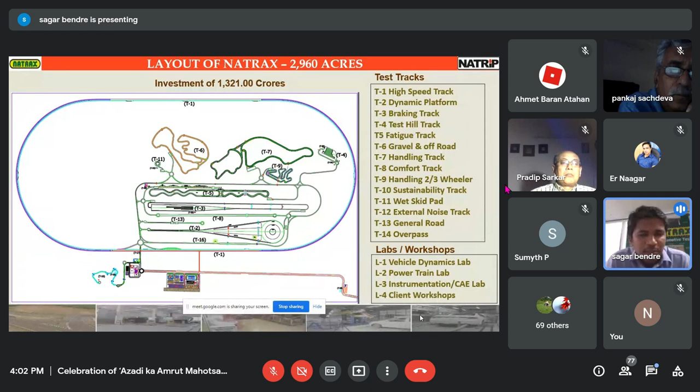The heart of the proving ground is the high-speed track, which is almost 11.3 kilometers. You can see the blue line on the outer periphery in the oval shape. And the inside facilities are the other tracks mentioned on the right-hand side, which cover all the durability and performance evaluation. So let me show you the aerial view of the Natrax facility.

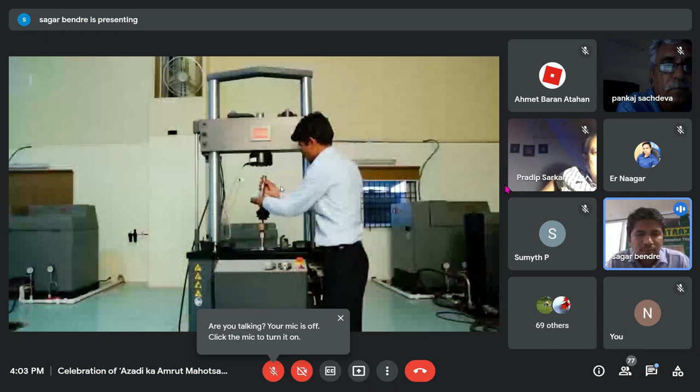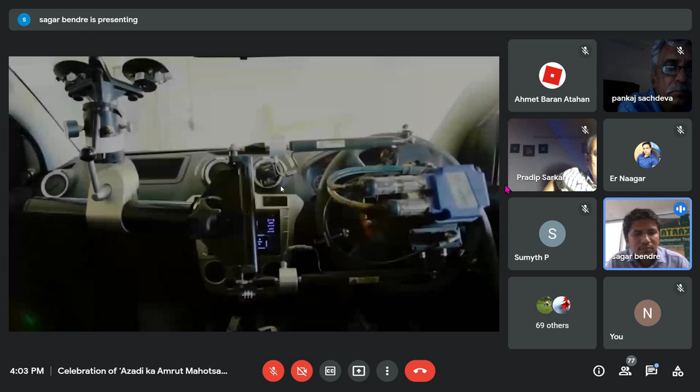Natrax, National Automotive Test Tracks, is one of the important centers under NATRIP and is one of the largest proving grounds in the world, spread across 2,960 acres at Pithampur in Dhar district, Madhya Pradesh, India. Natrax is a project of the Government of India set up to support the growing Indian automotive industry. Natrax offers 14 different types of test tracks, supplemented by state-of-the-art test equipment, research and development laboratories and workshops for comprehensive testing evaluation of all types of vehicles, ranging from two-wheelers to heavy commercial trucks, for vehicle dynamic performance, durability, and development testing by the industry.

The special tracks are dynamic platform, 1.8 kilometers long, braking track with 6 special surfaces for dry and wet tests, handling track of 3.6 kilometers long, fatigue track with 8 different surfaces, Belgium pavé, washboard, potholes and ditches, twist track, comfort track with 19 different surfaces, sustainability track, wet skid pad, two-wheeler handling track, and gradient track. It is the culmination of the Indian automobile industry's long-awaited aspiration for a truly world-class proving ground.

The beauty of Natrax's 11.3 kilometers long oval-shaped high-speed track, top ranked in Asia and 5th largest in the world. The high-speed track is 16 meters wide with 4 independent lanes. This track is designed for neutral speed up to 250 kilometers per hour and maximum speed up to 375 kilometers per hour on curves, and no limit to maximum speed on the straight patch. The 0% longitudinal slope makes this track an open-air test laboratory for precise measurement of automotive performance of vehicles. The banking on curves is of parabolic shape, designed for maximum speed.

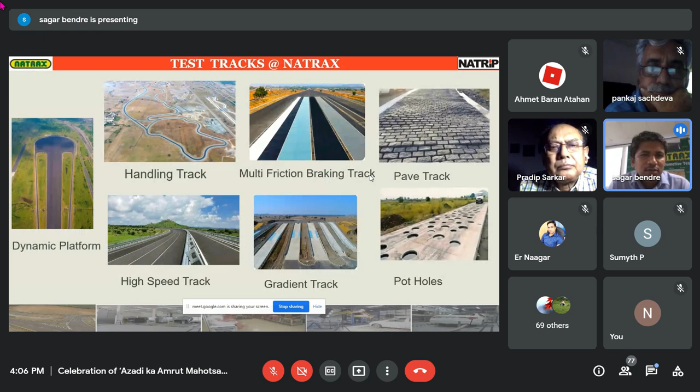So this was just a brief of the NATRAX facility. These are the few tracks which you must have seen in the video, covering different dynamic platform, handling track, braking track, durability, and high-speed track.

Now coming back to the genesis of the crash barrier testing in India. So initially, it was started in 2018 that one of the local manufacturers approached us and asked why we cannot do one crash barrier testing. So the scope was limited at that point of time. So the first test was conducted by NATRAX in 2018. Post that, there was no requirement, or we didn't get any approach from the customers.

So in 2020, the government released one guideline for the installation of the crash barrier, that they have to go for crash barrier testing as per EN 1317. So one manufacturer approached us, as mentioned by Dr. Karupaya in the initial statement. Then it was the start of the project, that why we cannot become a crash barrier testing center in India. So with that guideline, we initiated and started the crash barrier testing as per EN 1317.

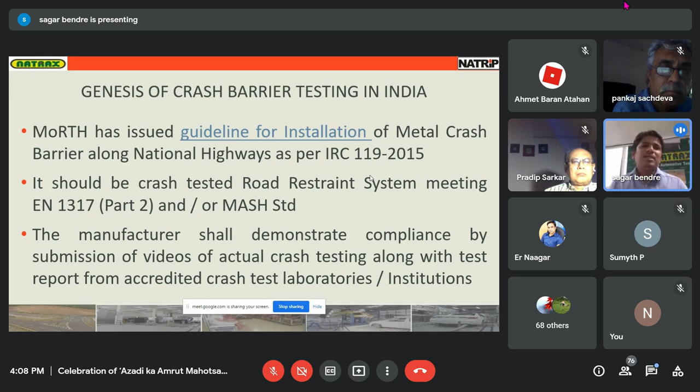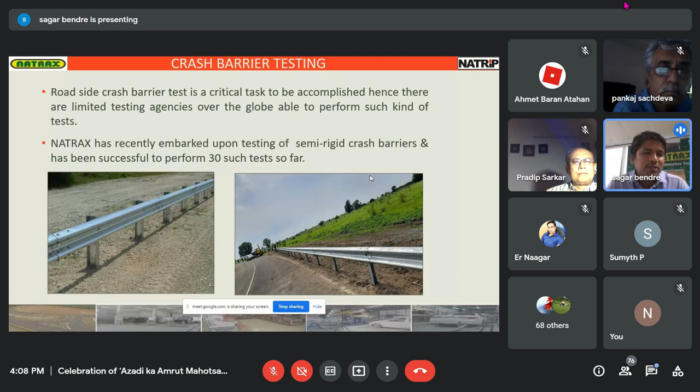So these are the basic benefits or the types of the crash barrier which are getting installed on the roads. Since most of the manufacturers are attending the presentation, I did not explain it on the test front.

So again, the thought was that the government has initiated the road safety push, which came into the picture a couple of years back, when the announcement was made that every road has to have crash barriers, and now this year, Gadkari Saab has announced that 20,000 kilometers of national highways are to be constructed this financial year, which indicates almost 40,000 kilometers of crash barrier to be installed. Even if not 100%, there is still a chance of 70% crash barrier on both sides of the road.

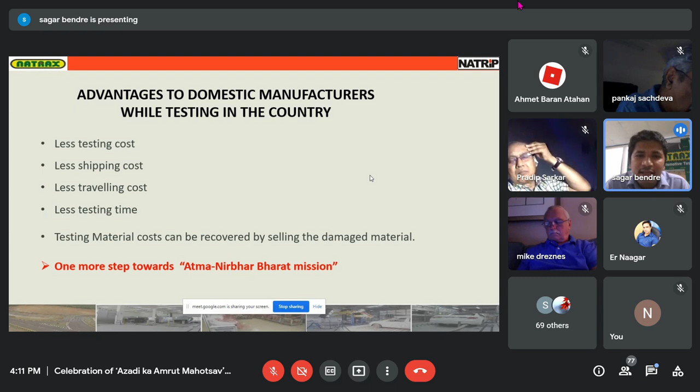But now in comparison with domestic testing, if we go with India, the testing cost is less. It will be almost 40 lakh rupees for 5 tests if the tests are conducted in India. Even the shipping cost is less: you can transport material from Kashmir or Kanyakumari to Indore, and it will take hardly 3 or 4 days maximum. Even the traveling cost is less, so your engineers or your teams can come and witness the test,

or we just formalize or sign the document by the manufacturer after the installation of the crash barrier. So we take a declaration that the way you install your crash barrier around the road, you just need to verify that the same way or the same methodology has been taken care of by Natrax.

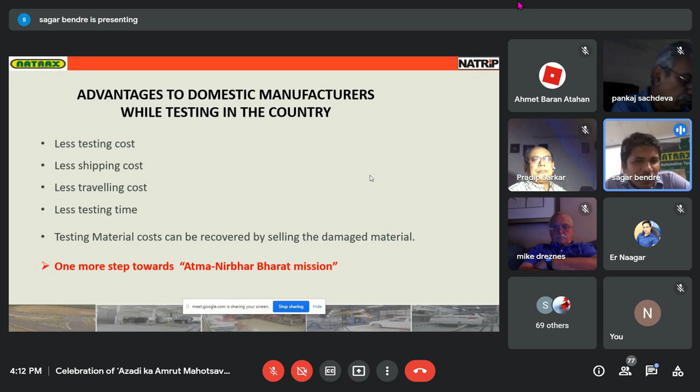Even the testing material cost can be recovered by selling the damaged material. Since the material is in India, you can use that material, resell it, or use it for any multi-purpose, because that material will not be wasted. And again, it is one more step toward Atmanirbhar Bharat, Make in India, what Modi ji said. So we say test in India also.

So let me show you one video of how Natrax generally conducts the crash barrier testing.

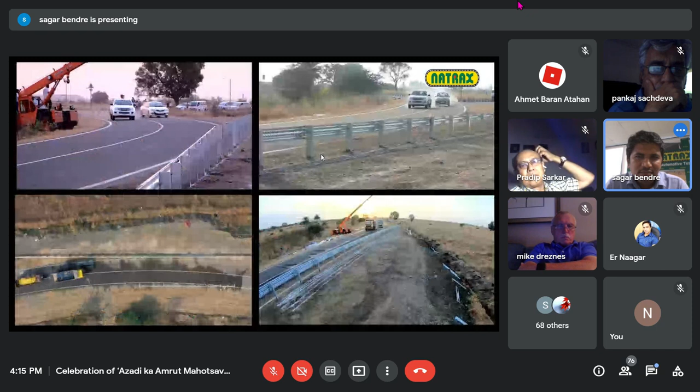So this was the overall aerial videography of the test which we performed. Just the technical aspect to be mentioned, in line with EN 1317: the W-beam has been categorized for 3 different tests, TB11, TB32 and TB42, in the first 3 rows. So if you want to certify your W-beam, you have to carry 3 vehicles, again categorized into H1 and N2

certificates. In India, N2 is still not mandatory, but testing at one point of time can give you 2 certificates if you want to get certificates for H1 and N2. So a car at 100 kmph, again a car at 110, and the truck at 70 kmph with different angles.

So here we use the methodology of a disengagement vehicle. There are 2 vehicles which you have seen in the video. The first vehicle is called the tow vehicle and the second vehicle is called the test vehicle. So the tow vehicle pulls the test vehicle, the test vehicle is released at the same location, and it hits at the specific angle within the angle tolerance, because the standard mentions an angle tolerance of plus minus 1 degree.

And for the truck and bus, it's only the barrier deformation which has to be defined in the working width category. So for India, W5 working width has to be there if it is a truck, and if it is a bus, even with the thrie beam.

So till now we have conducted almost 38, and today was the 39th test conducted for road safety. Path India, GR Infra, and Path India tested in 2018 and repeated in 2020 again. Aarneel, Utkarsh, Road Safety, Jindal, and there are a few customers already lined up for next month, so that may cross 50, which I am expecting within this year itself. One of the global players generally conducts 110 tests a year. So we are doing great so far.

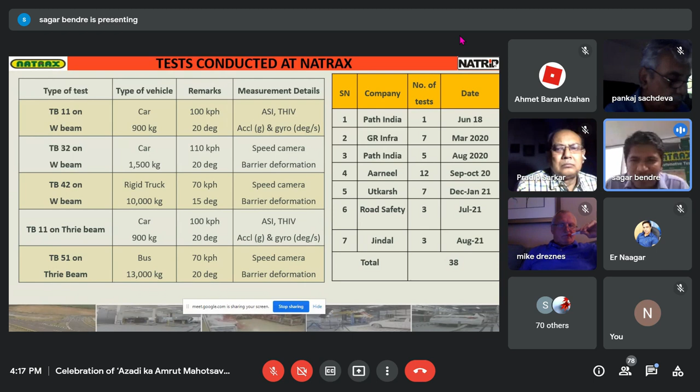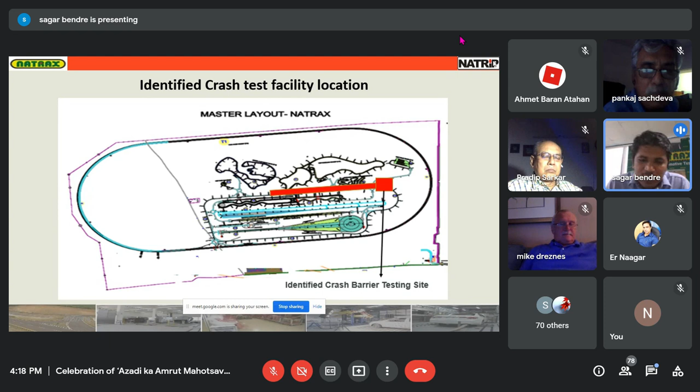So this is the crash location identified for the crash testing. We have one dedicated road of 2 kilometers, which can be utilized to maintain the test speed of 70 kmph with a 13-ton bus, which is possible only due to this road, where we can accelerate the vehicle and release it at one point of location. So this is the pulling mechanism.

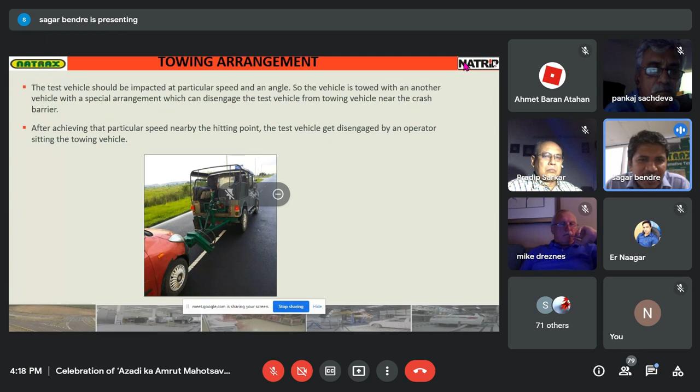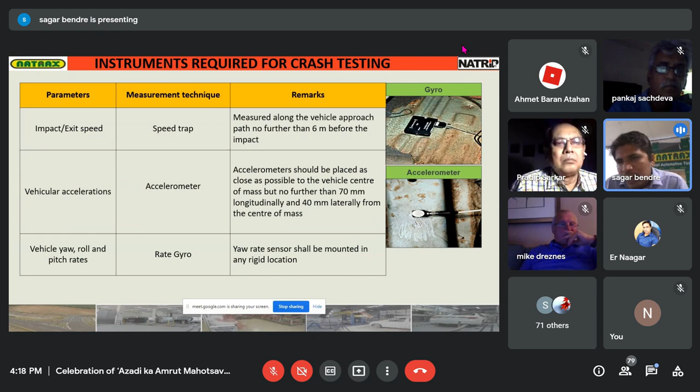You can see the front vehicle is a tow vehicle and the rear vehicle is a test vehicle, which pulls down the vehicle, and the hydraulics get it released at the specific distance and location. The technical terminology for ASI and THIV is the gyro and accelerometers, which are mounted in the vehicle. Generally, we bring the vehicle, do a CG measurement, and fix the gyro and accelerometers at that height, which lets us calculate the ASI and THIV.

And if the acceptance criteria are to be reviewed, then it's the behavior of the vehicle. The vehicle should not breach the barrier. It should not tear out. It should not go outside on the other side. The vehicle has to be redirected when it is hitting and then flow smoothly so that it can be redirected within the exit box. No major part of the barrier shall fracture and become detached.

In a few of the tests which we conducted, there was one test where the test was safe, but at one location the barrier was cleared out and the top portion flowed down to a working width of W7. So though the test was passed for W5, due to this fractured part which moved toward W7, it was treated as W7 criteria only. So it seems to be on the fail front.

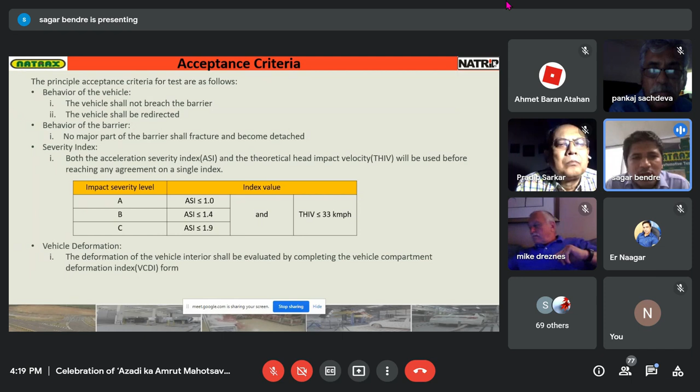Then the severity index, that is ASI and THIV. When the vehicle is instrumented, the ASI value will be calculated from the output of the instruments, and it's not a passing criterion, but there will be limiting criteria: type A, type B, type C. And the THIV should be less than 33 kmph. There is no minimum limit, but it should not cross 33, otherwise the test is to be repeated.

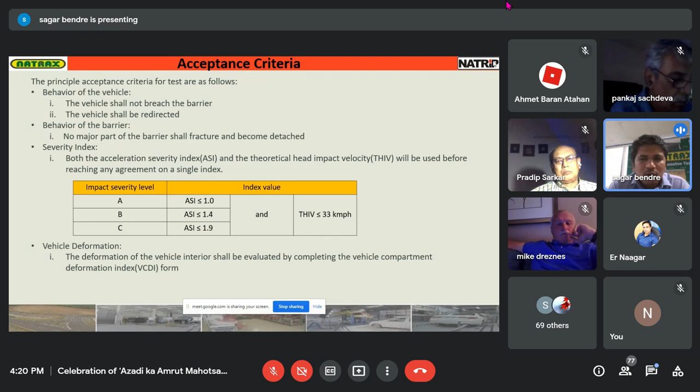Another terminology is the VCDI, vehicle compartment deformation index. When the vehicle is checked after the crash test, all measurements are done in line with the original measurements conducted for the vehicle. It deforms in different ways, and there are 7 different criteria on which the rating is given. That plays a very important role when you are going to install your crash barrier on the road, because the consultant will be reviewing these parameters.

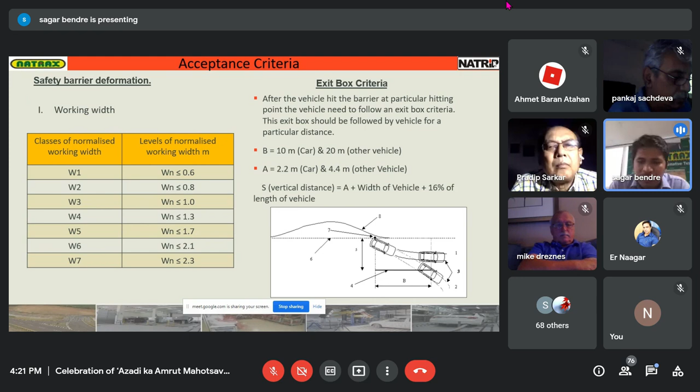So I said the ASI and THIV is for the passenger car, and the working width is for the truck and bus. The passing criteria for truck and bus is W5 for the plain road, and for hilly terrain it should be W4. Another important criterion is the exit box: when the vehicle hits the barrier and is redirected, it should not cross the exit box. So there are parameters A and B on the opposite side of the barrier.

On the containment level, which is mentioned in EN 1317, in order to pass a crash test there are a few parameters to be taken care of: contain and redirect the vehicle without complete breakage of the barrier, the principal longitudinal element. The elements of the safety barrier shall not penetrate the passenger compartment. They should not get peeled out and enter into the vehicle. Deformation or intrusion into the passenger compartment is again not permitted.

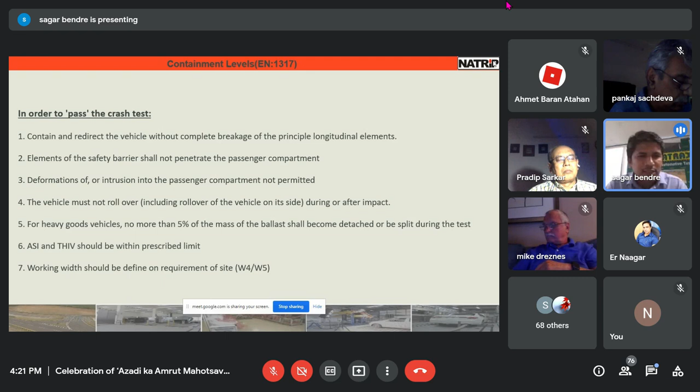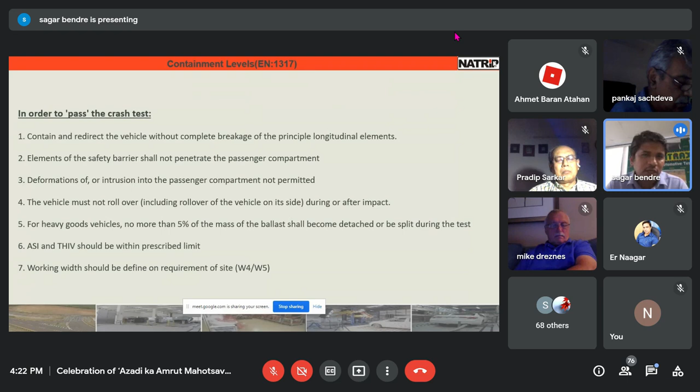The vehicle must not roll over, because on a hit, if the CG height is more, the vehicle will roll over, and that will not be treated as a pass test. For heavy goods vehicles, no more than 5% of the ballast should detach from the vehicle during the test. Again, ASI and THIV within the prescribed limit, and the working width should be in the zone which I mentioned. So to make a successful test, a few parameters need to be taken care of.

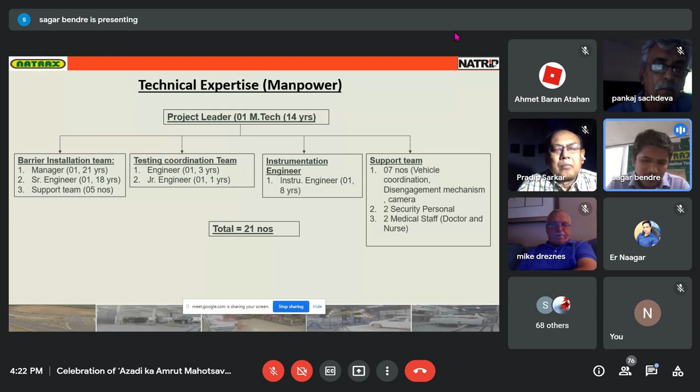And I mentioned that we have a dedicated technical team for conducting this entire exercise. It's a 3-day effort, starting from installation of almost 74 meters of barrier, then all safety checks and practice rounds, then installation of the disengagement mechanism, fixing of the cameras, and recording of the entire event, which is given to the manufacturer as testing videos. So a dedicated team is available at Natrax, which has been testing for the last 1.5 years. We are now crossing 39 tests.

So now, the presentation which we have witnessed from Ali showed how simulation plays a very important role, so that your cost on the actual ground will get reduced. Simulation gives a comfort zone to the manufacturer that 98% test positive results will be there, and the 2% can deviate from the simulation if any ground conditions are getting changed.

But what could be the future plan which Natrax is aiming to go for? First of all, the setting of an Indian standard in line with the EN 1317 and the MASH, as we are just following the European standard and the US standard. It should not be blind following of the EN 1317. Presently we have to do it, but a specific Indian-oriented standard has to be made, because, as Mike will be sharing in his presentation, 85% of the vehicles already on the road need to be tested.

But if you're following the EN 1317 or the MASH, the vehicle category and criteria are mentioned in the standard. Only a few vehicles qualify the criteria, and again it binds us to go for that testing only. There should be an India-specific standard, which we are requesting IRC to come up with, and let's form one standard.